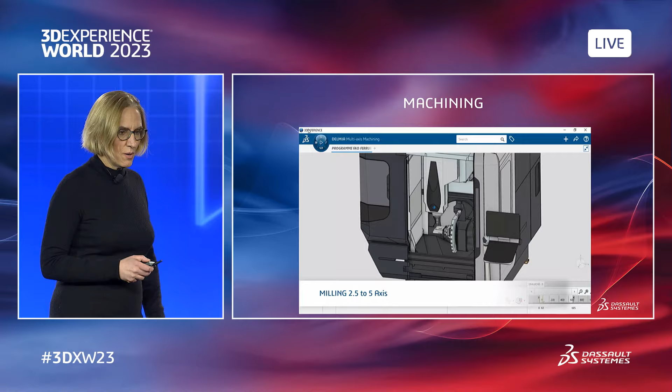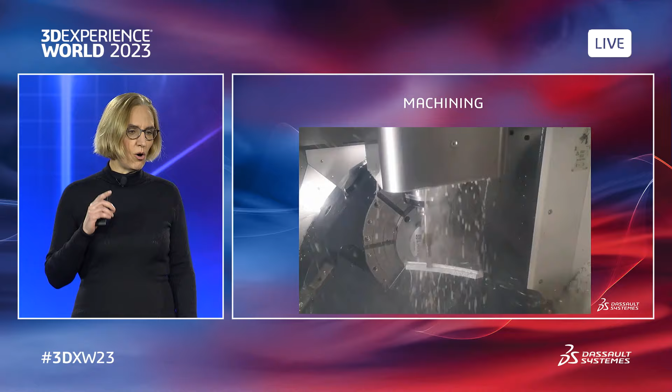So our CAM solution provides associativity with SolidWorks CAD and provides far more than tool movement creation to this new workforce. It is bringing a high-fidelity virtual shop floor to the NC programmer. With simulation always on, the tool and machine capabilities are always respected, ensuring tool path efficiency and safety.

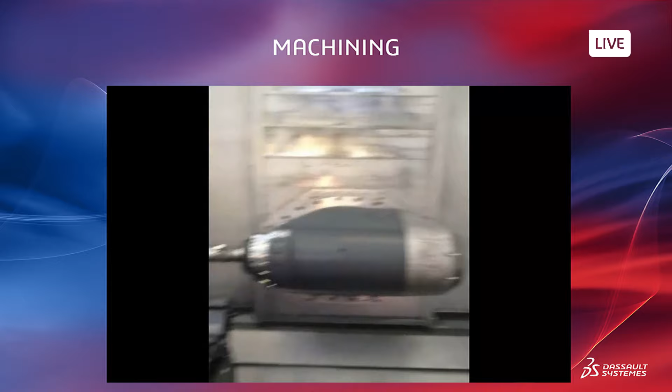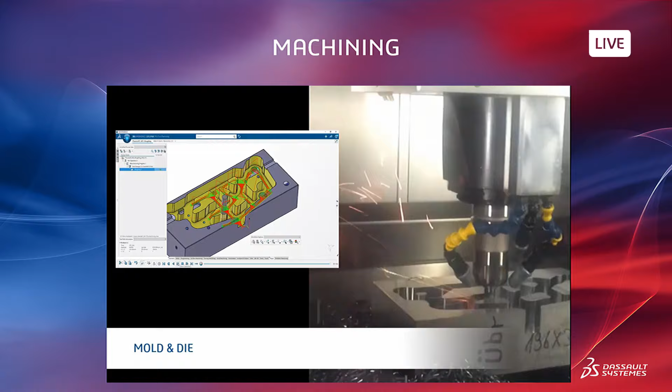Turning, milling, mill turn, wire EDM, laser cutting, water jet cutting, robot machining techniques are supported in our software to manufacture prismatic parts, rotary parts, as well as mold and die, and the most complex components for the aerospace industry. You can see all of that in our playground.

The DELMIA CAM solution also covers additive and hybrid manufacturing processes. This allows manufacturers to streamline activities in a common environment, avoiding costly data exchanges and extra training for users.

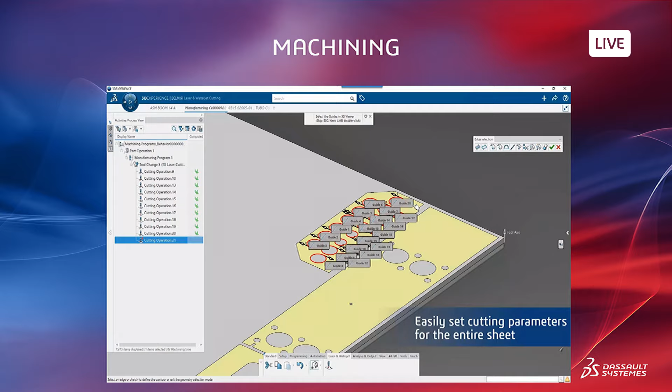DELMIA CAM makes it possible to store the machining know-how of experts, enabling a smooth transfer to a younger generation of NC programmers. Our recent studies measure a 50% reduction of training time with the intuitive new wizard-based user interface. And we use our software also in education, as you can see.

But in addition, automation is also a key transformation of manufacturing. It helps coping for insufficient workforce. It can also attract young talents to manufacturing.

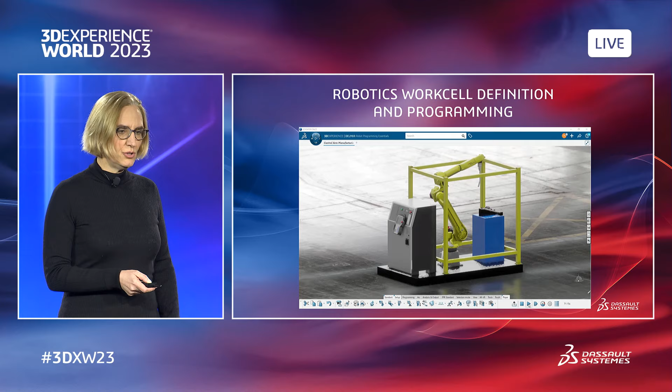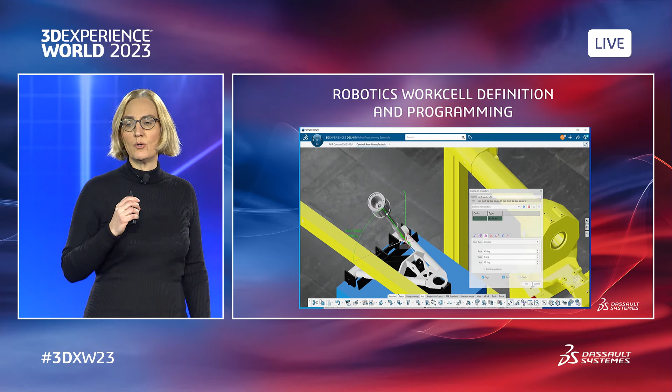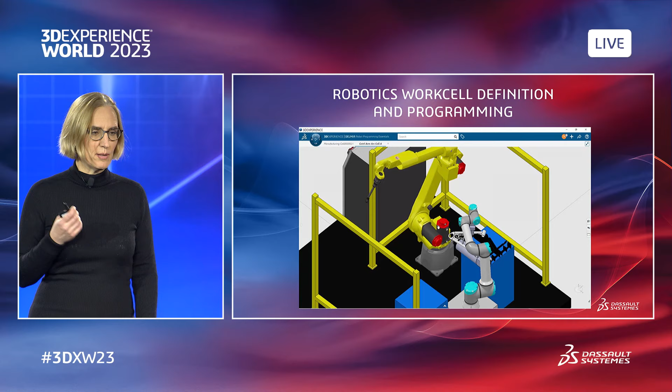So to help you there, we are introducing the new DELMIA robot programmer role. It is absolutely packed with functionalities that allow Solidworks users to imagine all the possibilities of engineering a robot work cell. It combines the capabilities that apply to every step of the engineering process, from work cell and plant layout to teaching and simulation, as well as work cell validation and offline programming the robots. All of this is contained in a single software role.

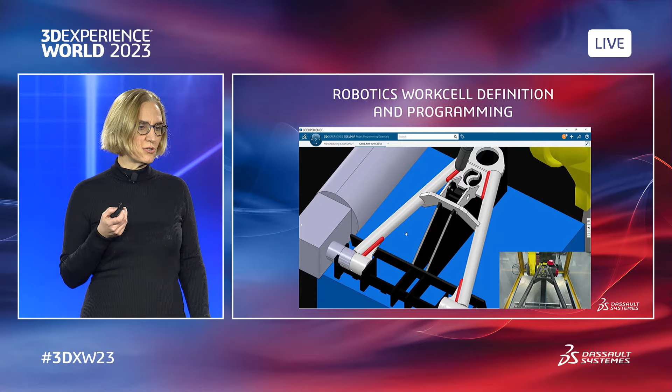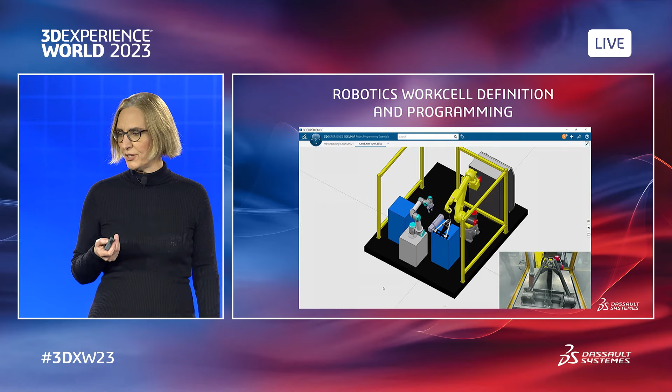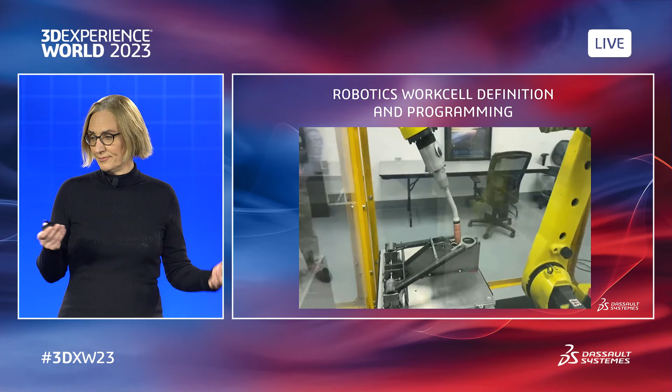So beyond NC machining that we just saw and robot simulation, programming, we also wanted to offer you, with 3DEXPERIENCE Works, the ability to simulate and assess different options for different workshop layouts.

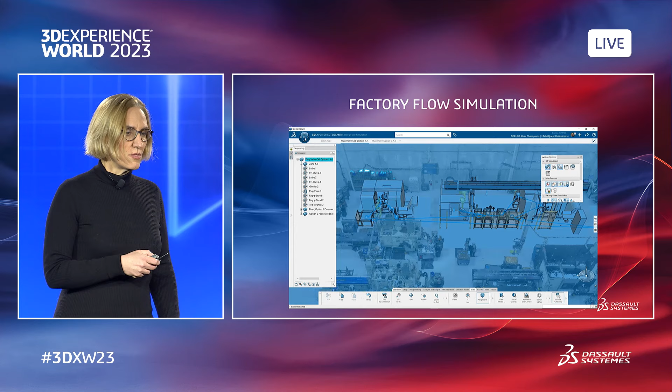The 3D point cloud scan of your existing factory is the perfect place to start re-engineering your production operations. With this virtual factory context, it is easy to explore and test alternatives when considering the introduction of new equipment, changing a layout, or even modifying worker assignments and shifts.

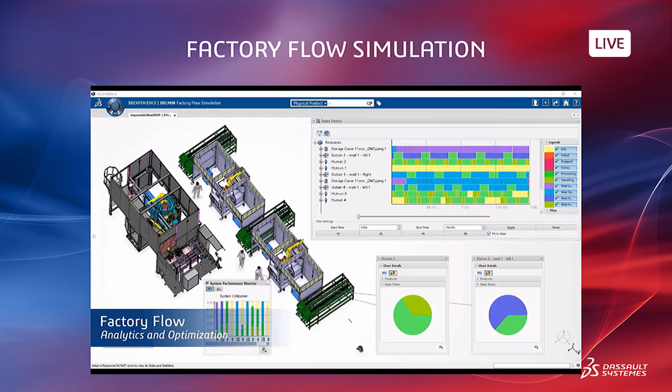A full range of simulation analytics gives you the information you need about performance and cost to select the best solution for your business. And we have a great testimonial on this topic at the end of this session.

Finally, single source of truth of operational transactional data is also the solution to manage efficiently your end-to-end manufacturing processes. This is what we offer in DELMIA Works Manufacturing ERP. And for that, I will let one of our users talk about it.

My name is Kevin Ahern. I've been at Kennerly Spratling since 1998. I'm the general manager. Kennerly Spratling is a contract manufacturer. We're based in California with divisions in San Leandro, San Jose, and then we also have an international division in Mexico.

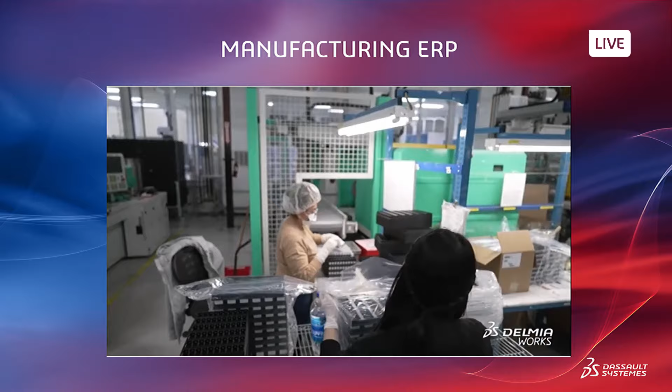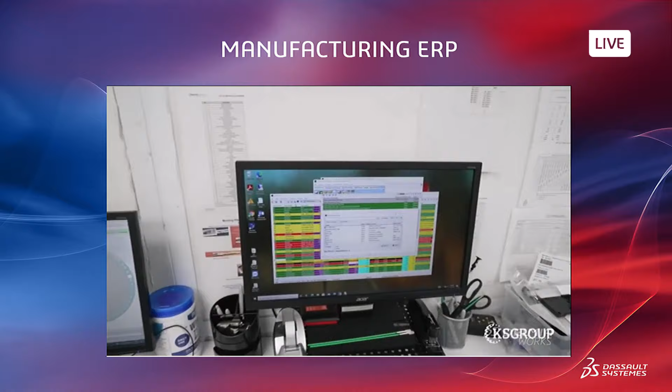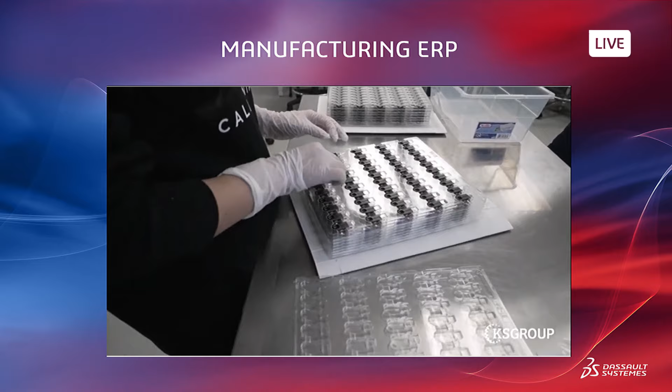The way in which Kennerly Spratling uses DELMIA Works' system is simple. It's from stem to stern. That's the foundation around which our system is built. An order comes in that generates requirements that push a work order. That work order pushes requirements all throughout our system. So our customer service team processes, and everybody else has to execute scheduling, purchasing, engineering, and quality. And then that gets into production, obviously, when we go to run a job.

So this concludes the overview of our awesome 3DEXPERIENCE Works manufacturing portfolio. I hope you enjoyed it, but it's not finished. It's now time to hear about another amazing, moving story.

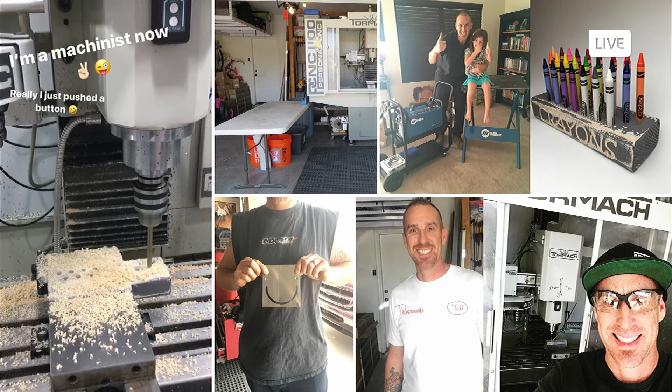When we moved here, we lived with my sister, and it was my wife and I and my two kids at the time, we have four total. We were living in one room, and I was doing air conditioning, installing microwaves, dishwashers, making $60 to $80 a day. Finally my dad helped us get a place, and I started using SolidWorks as a main source of income, doing design work, making Harley parts and this and that.

Well, because you still had your Tormach, right? Still had the Tormach. Part of that journey is you took your Tormach, took the skills you had with SolidWorks, went through that process, and it looks like, if we look on the screen here, there's a couple little ideas and things that you went through, right? So I really didn't know how to run a CNC machine, so it was a mixture of trying to learn.

My wife came to me and said, we basically need to make more money, we need food, we need diapers. So I just put my head down and started learning, whatever I had to do, sleep in the garage, make parts, scrap parts. Finally put an ad on Craigslist, got my first customer, and I remember getting paid $200 to make one part. It was heaven sent.

So in progressing, you started getting some business. You mentioned Craigslist, you go through that. If we're looking right here, it looks like you evolved from a Tormach. Yeah, so the photos you see there, that was a leap of faith.

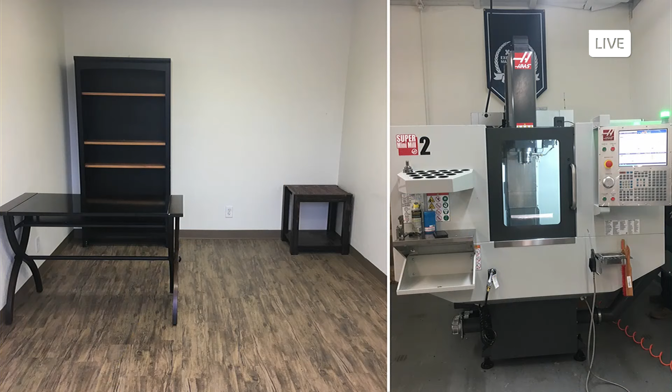We got our first shop, taking on the rent. I bought this machine. I didn't even know how to run it. I've never used a Haas in my life. So imagine going from the position I'm in, having no money whatsoever, now I have a shop, now I have rent, now I have a machine payment. I borrowed the money - I borrowed $40,000 from my father-in-law just to buy this machine. So there was a ton of pressure on my shoulders.

The gentleman that was up here earlier, Titan, he was a big help in that journey. His content was the most accessible at the time, as far as tooling. Whenever I was down and out and needed help with feeds, speeds, tooling, I remember buying a core drill, and he had a video where he went full depth on the core drill, and I was able to hog out the aluminum. It literally went from sleeping in the garage to making this part in a half day. It's like you got an instant pay raise.

So it was awesome. Now, we have this video here. We'll talk about this, and then in a second we're going to jump to Saylor here a little bit. Talk about this, because this sort of connects SolidWorks, right?

Yeah, so this is when we moved to Arizona, one of our local Boy Scout troops came - I guess the dad wanted to make a trebuchet, got in over his head. He gave me the plans, so we sat down and designed it in SolidWorks. I gave him the models basically, and he paid us. I was like, cool, job's done. And then he came back to me, he's like, I can't make it. Can you make it? So we ended up making the trebuchet - you could see that's from my front yard. I launched the ball over the neighbor's yard. It was cool, it actually worked.

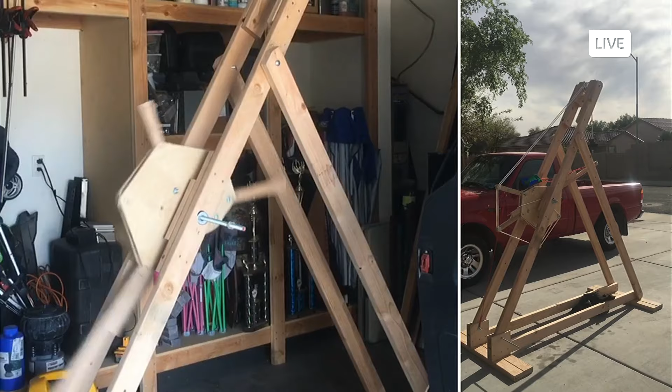So after this, obviously you mentioned moving with your family to Arizona. Things started to pick up a little bit. Your business started to progress, and again, we're talking 4 years ago to today. We're sitting right here, right? So things started moving a little bit fast. Can you talk a little bit about the changes in the family along the way there too?

So we added two more kids. I had another girl, and I had my first son. So that was on top of growing a business. We added two more, so that was extremely hectic. My wife's helping - she was homeschooling, she's running the business. So our home is absolutely chaotic, but it's just one big blessing.

Yeah, and you guys do a lot of stuff with Xometry too, right? That's one of the things that you do a lot of work with? Did a lot of work with Xometry in the beginning, did a lot of their training videos - how to make their test part. I went through the whole program, how to make the test part, how to make the lathe part. So that was good, and then just slowly progressed with them. I was doing several videos and stuff.

So now we're going to get to you. Talk a little bit about this, because one of the things that was really cool, we got a chance to meet you at IMTS, right? You guys were there, I think it was a birthday. You went to IMTS, right? Yeah, so it was my 10th birthday.

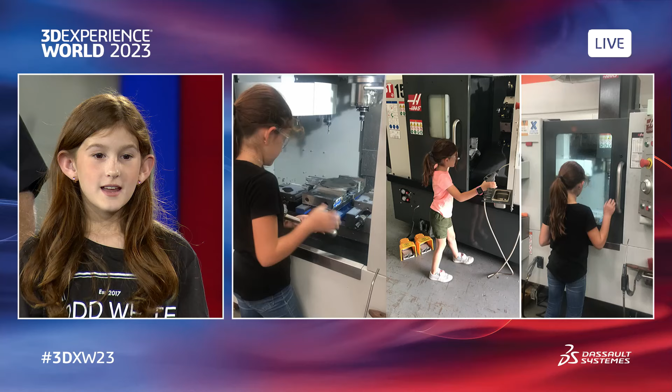Let's talk a little bit about you running the machines here. So explain a little bit about what you're doing here. Okay, so that one I was making - those are adapters for the mining industry, so they get welded onto the large tractors. So she's just putting the tapped holes into it. I showed her how to do the job in about 10 minutes. So I had to put the part in, make sure it was on the right side, tighten it, hit it with the hammer, then press a button, and there you go. That's as easy as it is, huh? Yep. That's pretty awesome. She actually did such a great job, and she completed the job, so I was like, I'm paying you, you did amazing. She worked 8 hours that day, and I was extremely proud of her.

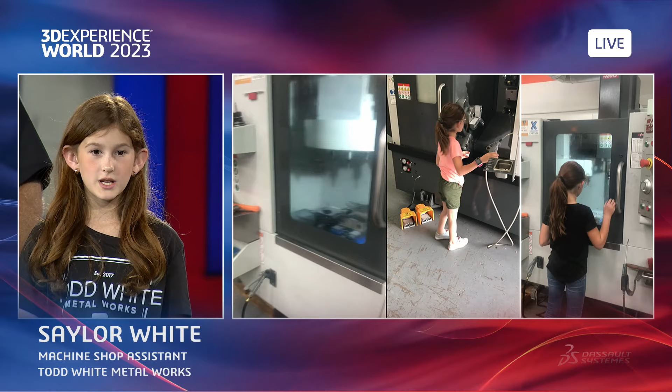So we have the other video here where you're running the lathe. Can you talk a little bit about the steps for that? I was opening the chuck and drying the part, and then putting it onto the plate for it to be finished. And then I push it back in and close the chuck, close the door, and push a button. That's pretty awesome steps right there.

I see you were a smart machinist there. You held the door shut when you blew the chips, right?

So are you doing inspection on the prints? No, my dad is. She's learning how to inspect the parts, and I'm teaching her how to read decimals.

So is this the finished part, you're taking it out and replacing it? I remember being so excited putting in the last part and taking it out. It was so fun, so exciting.

So how many parts did you run on that? Do you remember? I think it was about 200.

When we jump forward here, I think your sister's in that view too, right? My little sister, Zoe, she's right there in the audience. So what are you doing in those pictures? We are putting bolts or assemblies together, and my sister is helping me put them together.

So you're doing assembly? So you did machining, you did assembly. You enjoy going in and working in the shop and building things? Yes, it's really fun. I enjoy hanging out with my dad.

One of the things I heard is that you have a business idea, and I know we can't talk too much about it. But I also heard there was some advice that your mom had as well. Can you share what that advice was? She suggested... something about don't work with your dad. Don't work with your dad because he will be too busy, and he'll never make your parts.

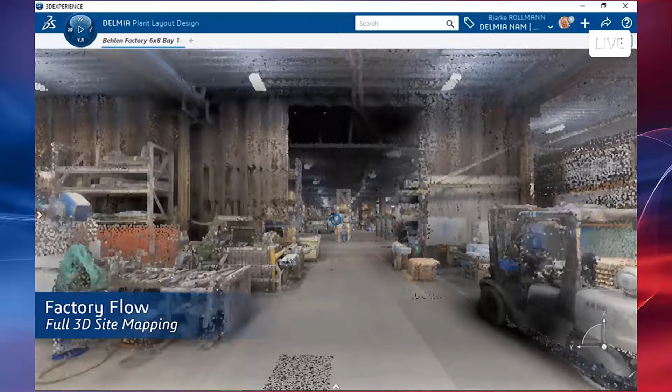One of the biggest challenges is how do you collaborate with multiple business units. It's not like within this 900,000 square feet that this person has their square and this person has their square. It's really somewhat of a hodgepodge where they overlap in certain areas. So the task at hand is, how do you find that space for bringing in new equipment? How do you find the space for moving something else? We have a current capital project coming in where the assembly line is going to be over 200 some feet long, and the current assembly line can't be removed to put that in. So you have to do a lot of collaborating with business unit leaders, manufacturing managers, team leaders throughout the whole group. It's a challenge to make everybody happy—you might make the person happy who's getting the machine, but you're going to upset the people that are there.

Taking a look at the video you're seeing, this shows you what our facility is like. It's not fresh, it's not new, there's stuff everywhere. So being able to use the factory flow simulation, the 3D model, truly allows us to show those opportunities to business unit leaders, to show what's possible without them having to think about it. The idea that a picture's worth 1,000 words truly is true when you can look at our facility. As we move the materials, move the equipment, and use the factory flow, it's going to guide us in the right way of setting everything up correctly for what we see in the future—5 years down the line and 10 years down the line—and allows us to really use lean principles and everything else, and hopefully get the job done right the first time.

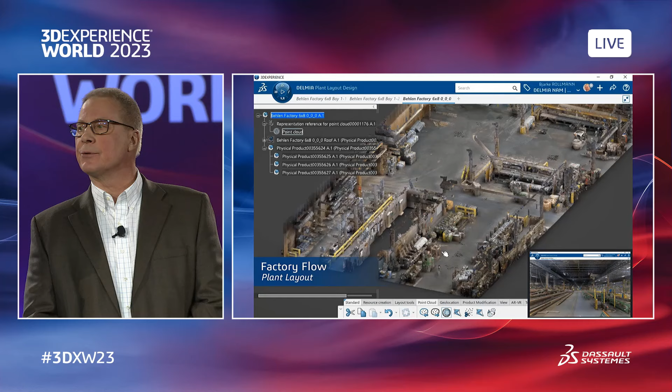Being able to lay it out for a vision of the future is a big deal for us, and being able to simulate that without physically having to move things or hook something up and try it first and say, oh, that didn't work, we should try it this way—that's what we're envisioning down the road as we go forward, as to how we can do this in a way that makes sense 5 years from now, 10 years from now.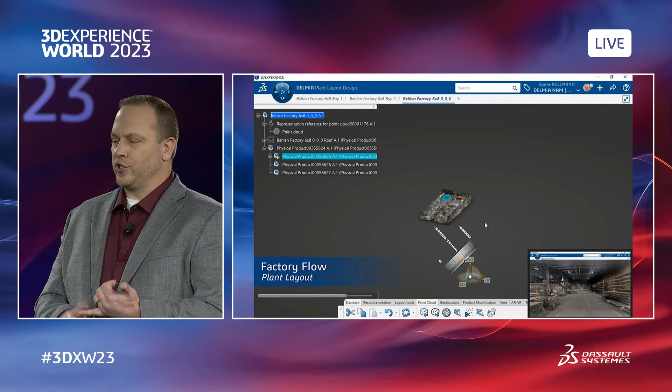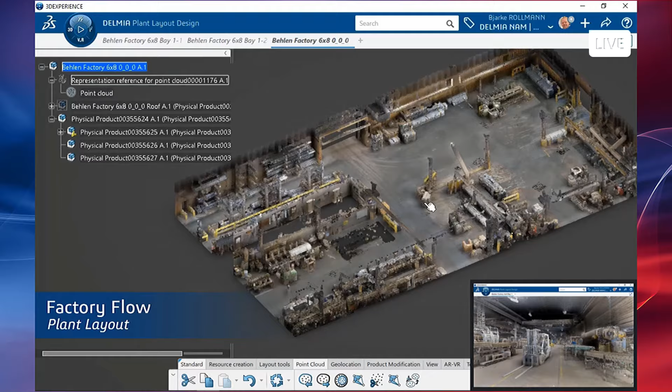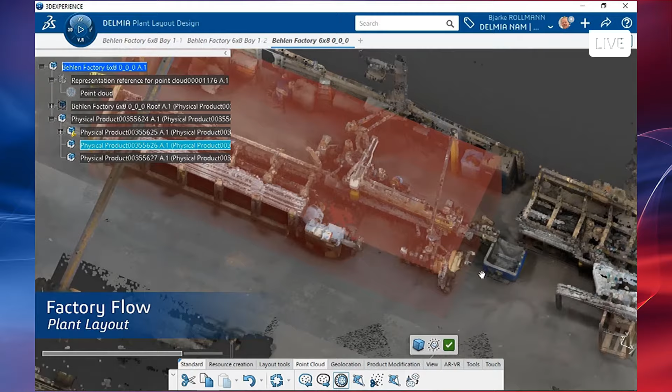Some of the other stuff it truly adds in as well—your standard layouts were just boxes, but did you include every chair, every desk? Did you include the trash can? Did you include the sawhorses, the pallet jacks? Some of the things it can help you do overall is we're seeing where our facility might have had a trestle to hold beams, but we might have 10 different trestles. So the process, as you can see in the video, is I either have to remove the item to show it's not there, or use it as a block. When you start looking at lean and standardization, this helps drive a lot of those situations, because now we can look at it and say, hey, why do we have 20 different styles of trestles when we can have one? It not only simplifies our plant layout, but it simplifies everything moving forward at that rate as well.

When we talk about your project, you also explained that you have to manage in parallel, keeping older processes or older machines while moving to the new.

Can you tell us more about how you manage this diversity of processes and moving, not in one shot to the next phase, but also making sure you're able to continue what you're currently doing in terms of activity?

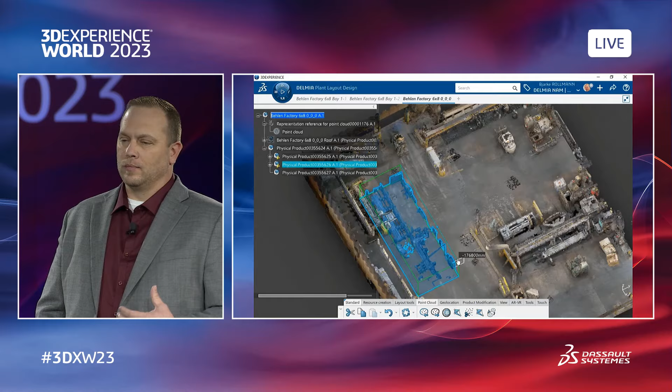It comes down to finding that space in the collaboration between groups. The current project we're working on spans part of one business unit's space and part of another's. We want to maintain the process flow and make sure it makes sense. When you're moving equipment, you don't want to move it two or three times to find the right way. So working with those departments, we have to move stuff out of that bay to make it work. So one move of bringing in a piece of equipment can turn into 20 moves of other equipment.

It's nothing simple. We have to really look around and find, like we said at the beginning, what's best for the flow and the process, not just for today, but for the next 10 years, making sure we don't run into the same situations we've had in the past.

The nice part about this software is you can put it on a screen and show everybody what it's going to look like. It helps them envision what we're trying to accomplish and get everybody to buy into that collaboration, to hear our vision and their concerns, and make sure we didn't miss anything.

Getting everyone to buy into this process of standardizing, changing, or optimizing is probably a key part of what you have to do. The factory flow is a nice tool we can use to plan and show ourselves what we're trying to do.